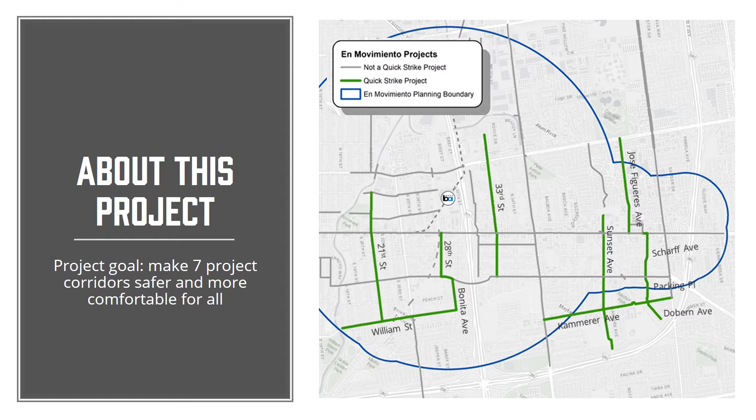The goal of this project is to make these 7 corridors safer and more comfortable for all people, whether one is walking, riding a bike, or driving a car. We want people on these streets to slow down and watch out for one another.

This project is funded by a grant from the Metropolitan Transportation Commission. In early 2021, MTC awarded the City of San Jose $1.4 million to design and construct 7 bike boulevard projects. The grant requires that projects be ready for construction, i.e. shovel ready, within 1 year of the grant agreement. We are on pace to reach that milestone and expect construction to begin on these corridors in spring of 2023.

If you are not familiar with En Movimiento, it is a community-based transportation plan completed by the Department of Transportation in 2020 and adopted by San Jose City Council in February 2021. The plan builds upon past planning efforts and proposes projects that support transit, walking, and bicycling in East San Jose. En Movimiento is where the 7 quick-strike corridors were originally envisioned.

Here we see the 7 project corridors. From northwest to southeast, we have 21st Street, William Street and William Court, 28th Street and Bonita Avenue, 33rd Street, Kammerer Avenue, Sunset Avenue, and the Jose Figueres corridor, which includes Scharff Avenue, Packing Place, and Dobern Avenue. This map also shows other projects within the En Movimiento planning boundary. Taken as a whole, you can visualize a multimodal network that will allow one to travel all over in a variety of ways.

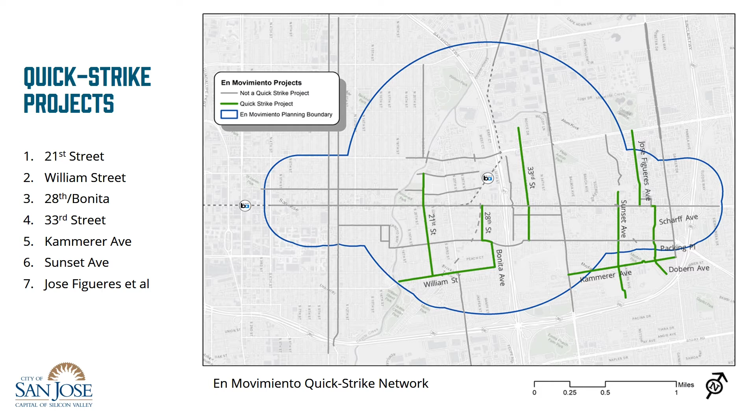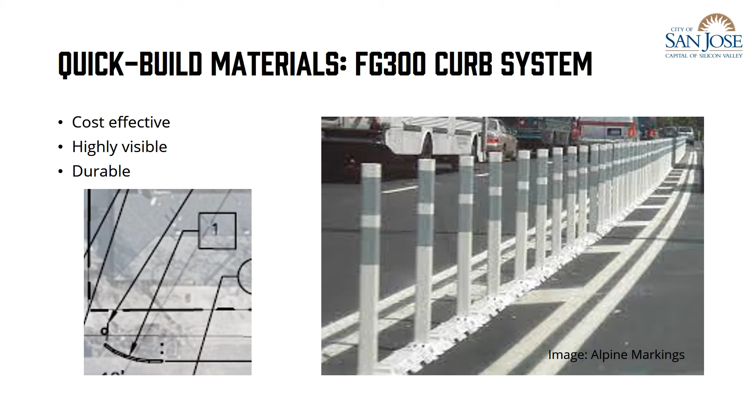We will be using the FG300 curb system pictured here on the right. The FG300 posts and curbs are highlighted on the plan sets by a 1 with a box around it, as pictured here on the left. Now I would like to take you through the different treatments you will see and give you an idea of where you will see them and also what they might look like once constructed.

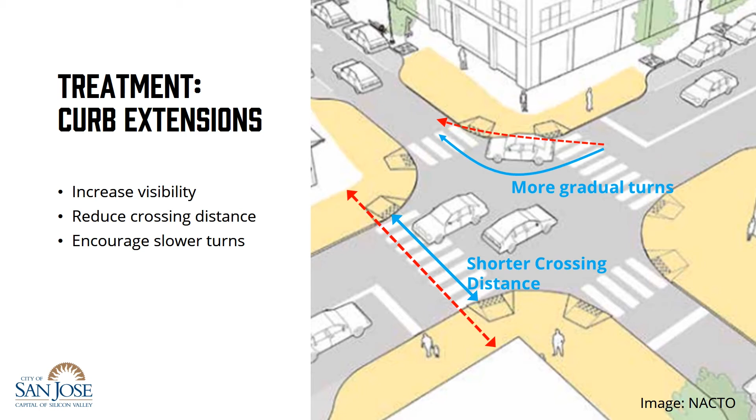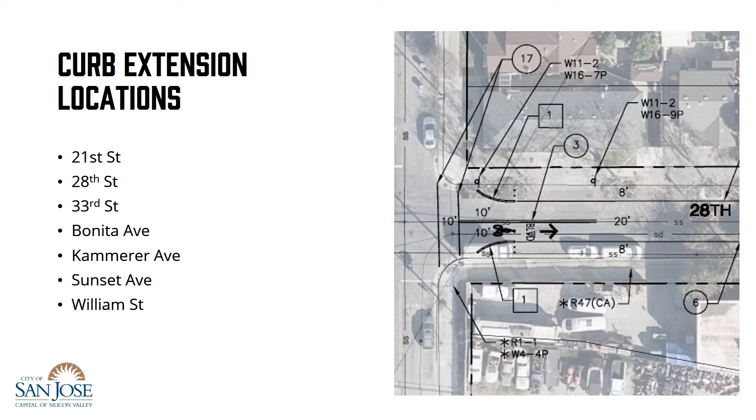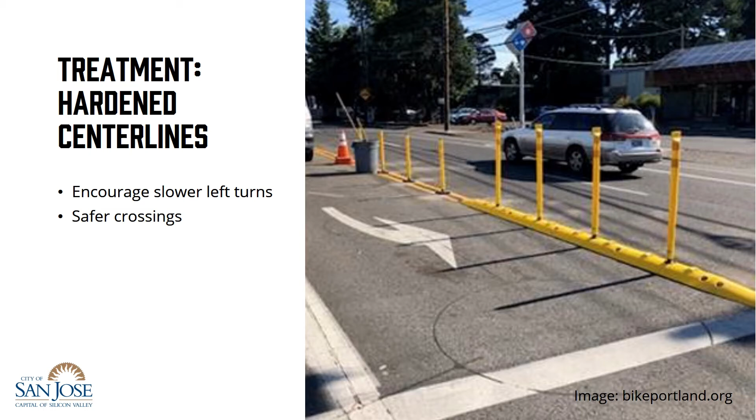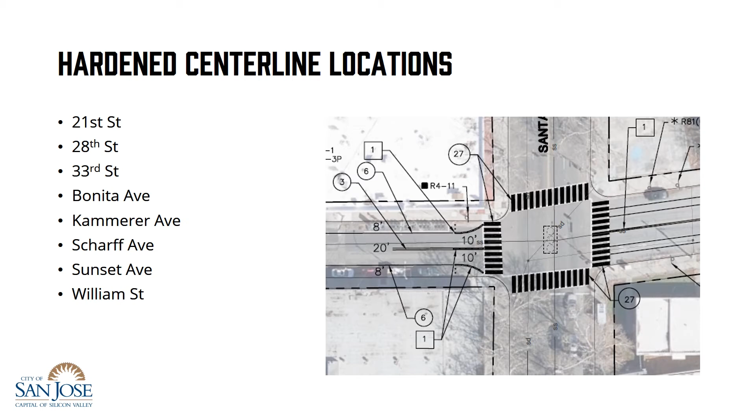The next treatment we have are called pinch points. Pinch points are a combination of the first two treatments, curb extensions and hardened center lines. Pinch points reduce vehicle speeds by visually narrowing the roadway. Think about driving through a toll booth. There is plenty of room for your car to fit, but most people slow way down to ensure they make it through.

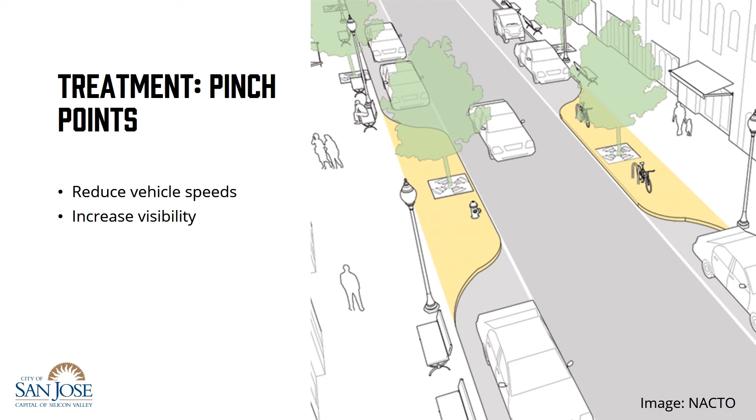We already saw one example of a pinch point on the plan set when we looked at hardened center lines. This is another example at a mid-block location on Kammerer. We have pinch points on 21st Street, Bonita Avenue, Jose Figueres Avenue, Kammerer Avenue, Sunset Avenue, and William Street.

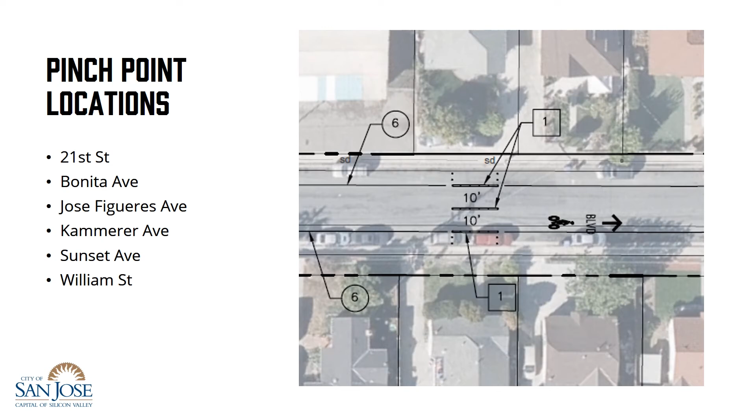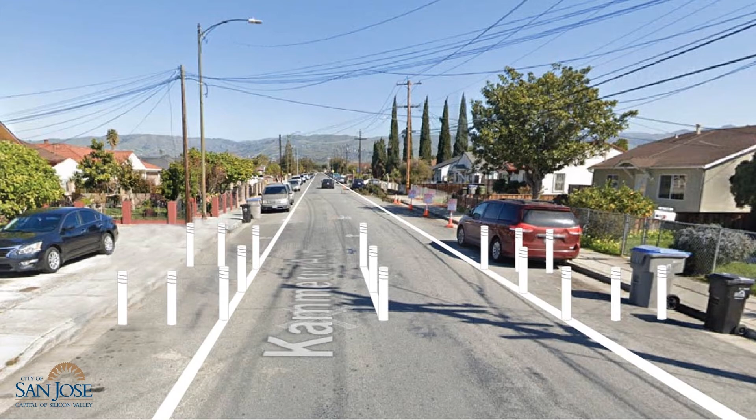Let's look now at what a pinch point would look like on Kammerer. Here we are with today's configuration, and we're looking east. Now we see the FG300 posts lining the outside of the roadway and the center line, visually narrowing the roadway and encouraging drivers to slow down.

The next treatment we have are median refuge islands. These are somewhat similar to the hardened center lines, but instead of one row of bollards, we go 2 wide. Like hardened center lines, they encourage slower turns and safer crossings. They also narrow the travel lane to encourage slower speeds.

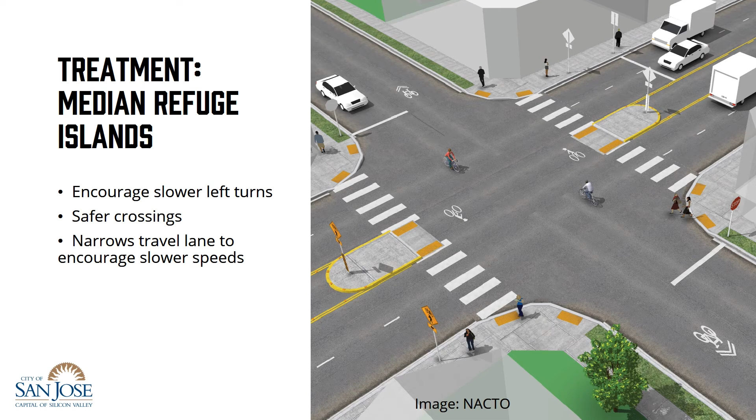Here is a median island on the plan set. You can see 2 rows with an additional bollard at the tip and the end. As you can see from the list here, the plan sets show median islands on nearly every corridor, save for 21st Street and parts of the Jose Figueres corridor.

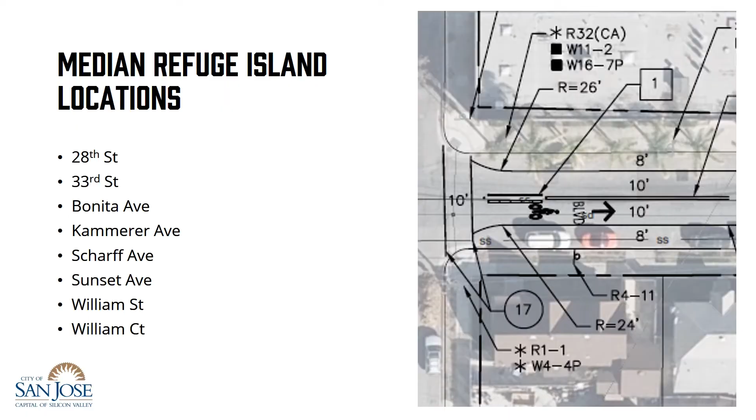The next treatment we have are called chicanes. Chicanes are when we use curb extensions to create an S-curve in the roadway. This encourages drivers to slow down since the roadway is no longer a straight shot.

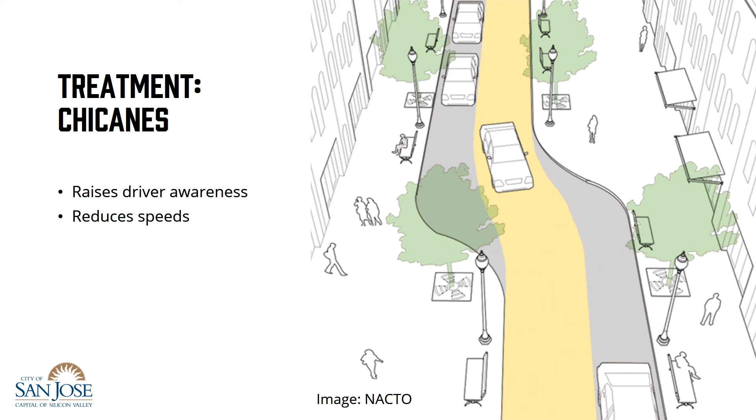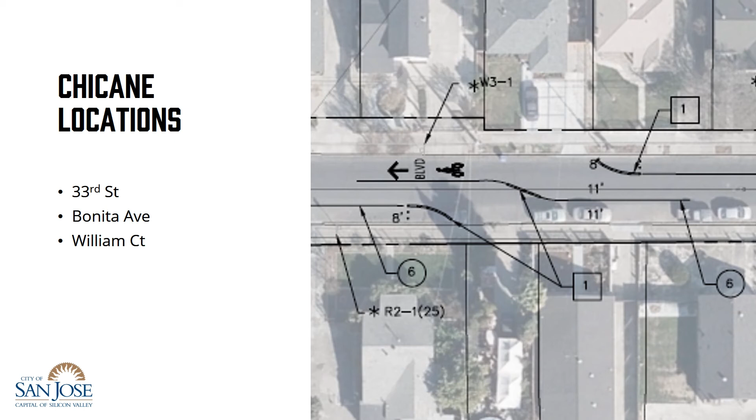Here we have 33rd Street today. We're looking north towards St. James. We have cars parked along the left side of the road and 2 travel lanes on the right side. Here we see the chicane creating a curve in the roadway. As we head south along 33rd Street, towards the bottom of the image, we see the travel lanes shift and the parking is flipped to the other side of the street.

Here is another look from street level. First, as it looks today. Then we add the chicane, and you see the travel lanes shift from right to left, and the parking alternates to the other side of the street.

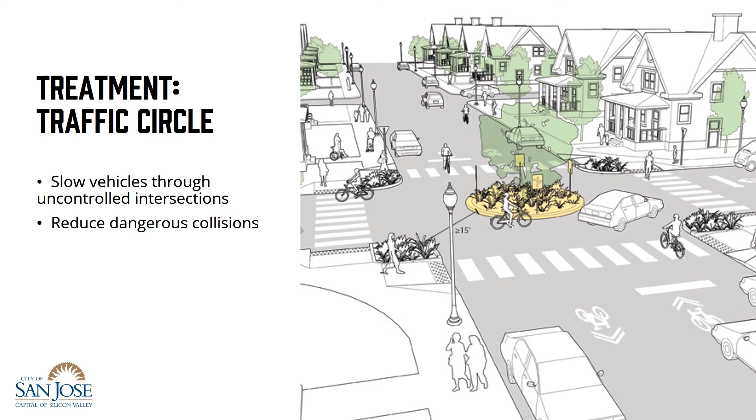Our final treatment is the mini roundabout, or neighborhood traffic circle. This treatment slows vehicles through uncontrolled intersections and reduces dangerous collision types. We recently installed several quick build circles along San Antonio Street. We will be using different materials for the circle that is part of the Quick-Strike project. Instead of paint, ceramic domes, and plastic posts, we will be using a bolt-on plastic and rubber curb system. Here we see an example of one such circle from the Presidio in San Francisco.

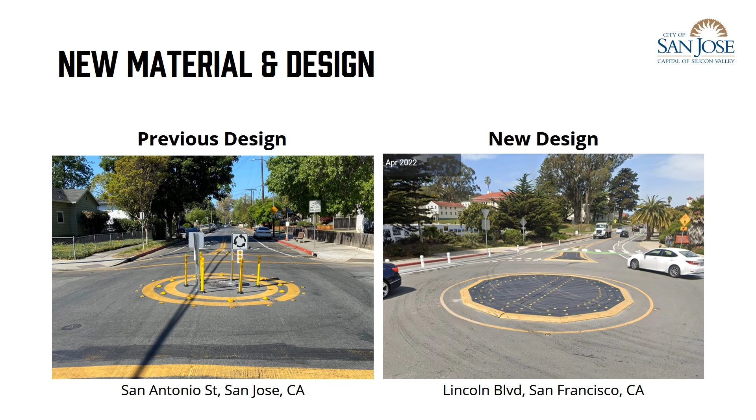We only have one traffic circle included in the Quick-Strike designs. It will be at the intersection of Jose Figueres and Alexian Drive. You can see here that this intersection is pretty wide. Looking at the plans, we can see that drivers will no longer be able to speed straight through this intersection. Instead, they will have to slow down to maneuver around the circle and the approach islands.

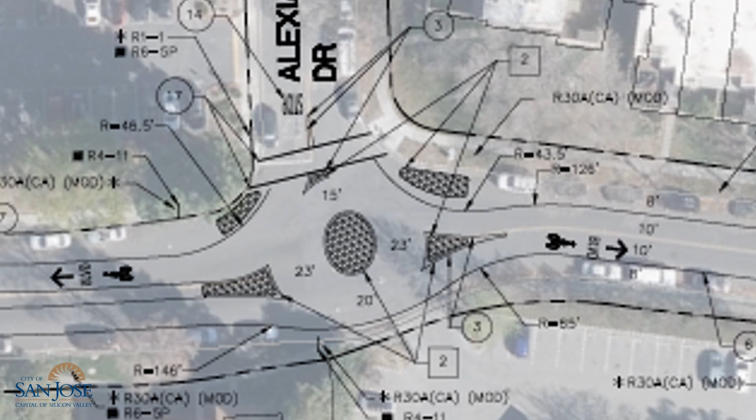So what comes next? As I said in the beginning, the Quick-Strike program has a relatively quick timeline. That may be why they named it Quick-Strike. We expect construction to begin in spring of 2023. As we are building out the Quick-Strike improvements, city staff will also pursue funding to build out the long-term vision for these corridors. We are happy to have the quick build treatments and their benefits in the near term, but we aren't going to be satisfied with that. We will also evaluate the quick build treatments to understand if and how we can improve on the designs.